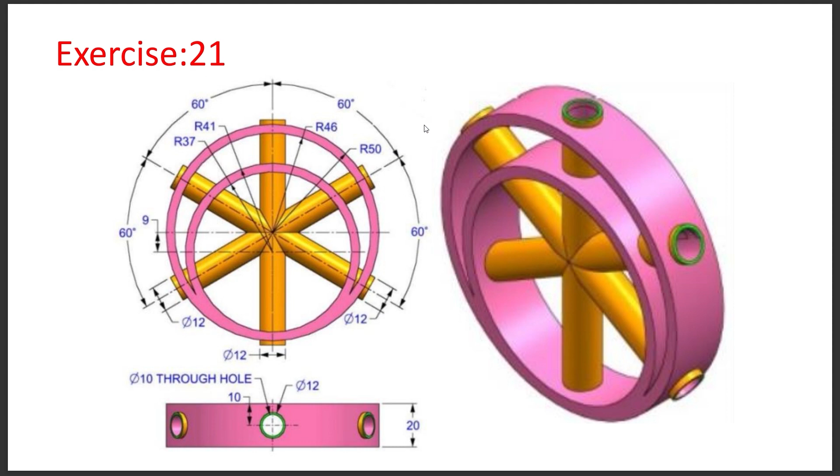After sketching this, we need to extrude it to a depth of 20 mm, and we need to provide some specific holes 60 degrees apart. Inside those holes we need to provide some bars having a through hole of diameter 10 mm inside. So without wasting time, let us start our modeling using Autodesk Fusion 360.

First of all, we need to create a new design, and you can save this one by the name exercise 21. We can save it to a specific folder by the name Fusion. Let us save it — you can see it is saved by the name exercise 21.

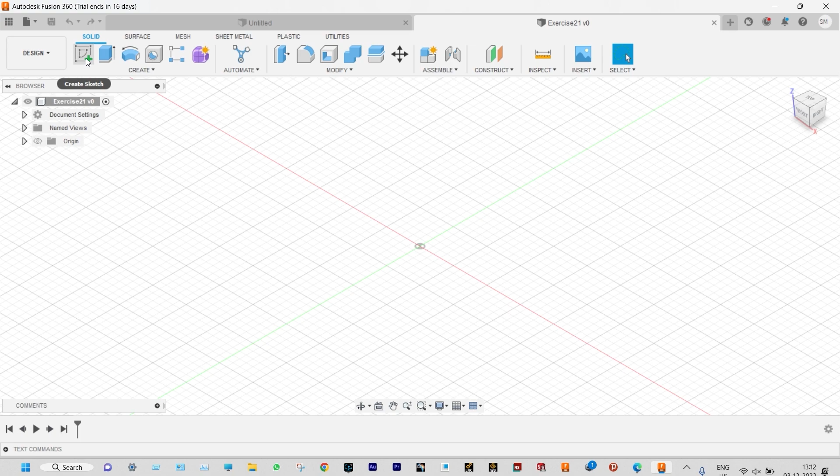As I told before, it will be started with the front plane only. So starting with sketch, let us select the front plane. Initially we need to draw one construction line. So starting with lines, and it will be a construction line.

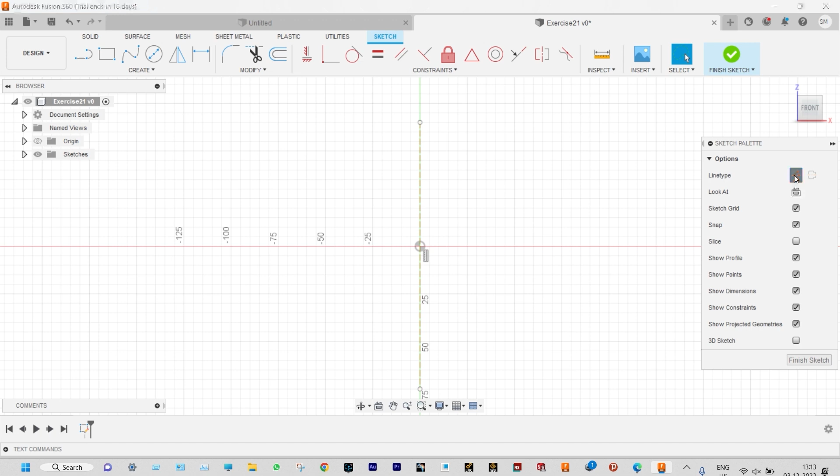Now let us change the line type from construction line to solid line. We can start drawing concentric circles from this location. This one will be having a diameter of 100 mm.

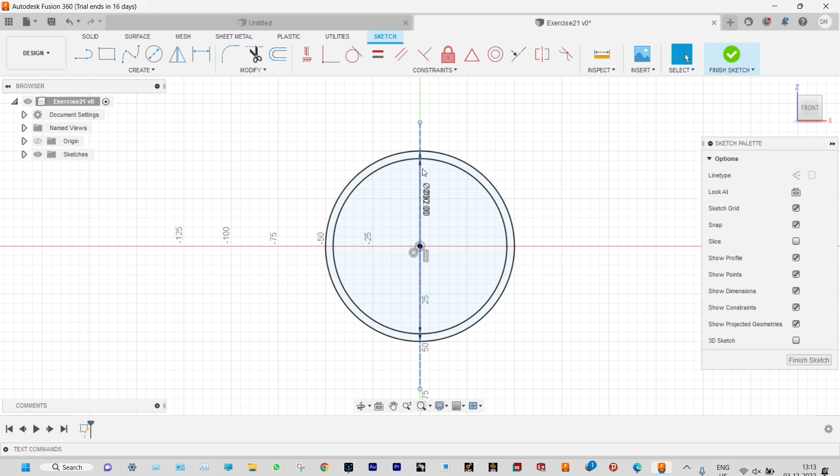Another circle to be drawn with a diameter of 92 mm — these two are concentric circles. Next, at a specific distance away with an offset distance of 9 mm, we need to make another concentric set of circles, starting from here.

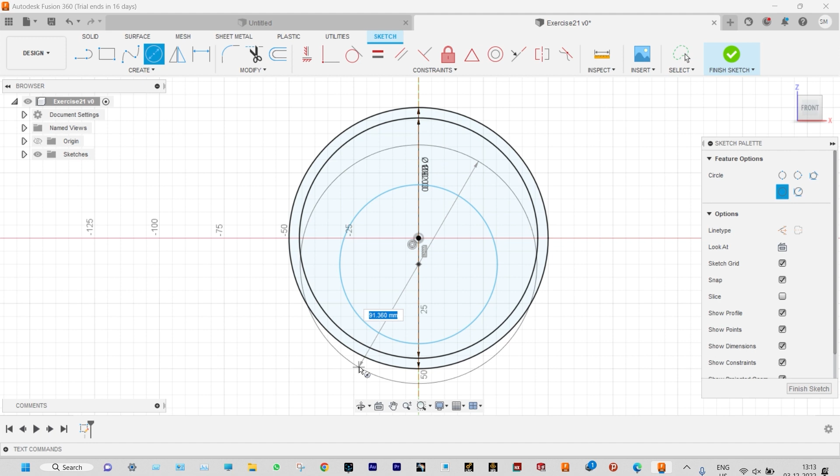Let us provide two circles at random and we can provide smart dimension later on. Let us provide smart dimension to this one as 74 mm diameter and this one will be 82 mm diameter.

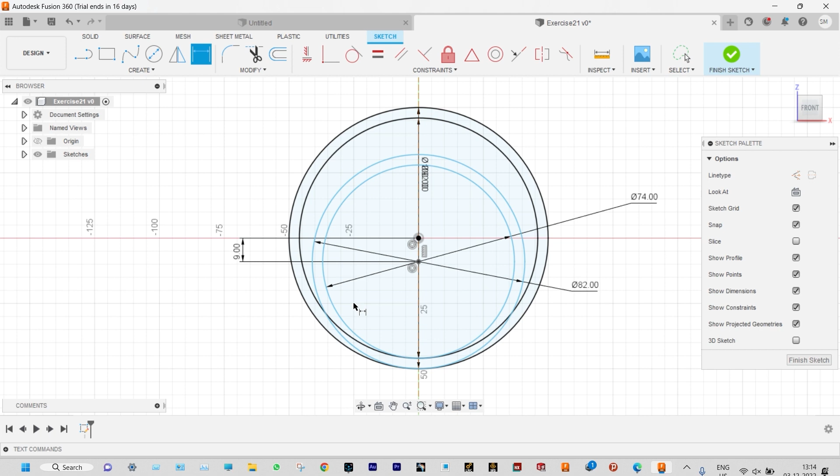Again, we need to find the offset distance of these centers and the previous center by 9 mm. It is evident that this circle is tangent to this circle. All the circles are not black, so the dimensions are not fully defined. To make it fully defined, we need to put some kind of constraints.

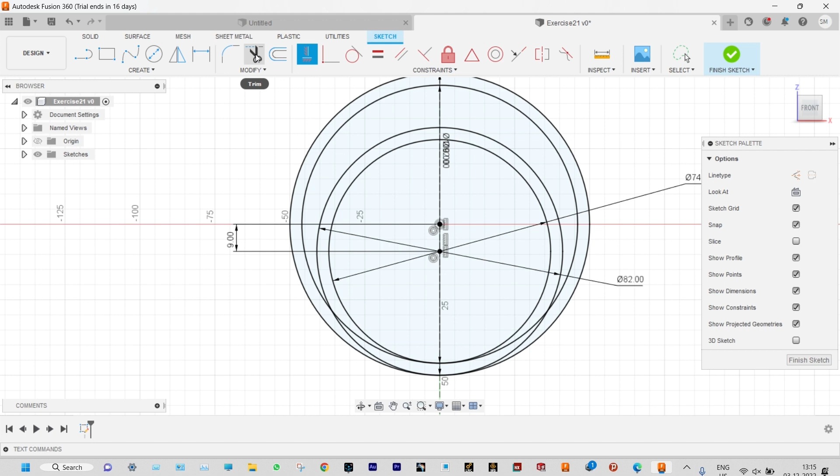Let us select the horizontal and vertical constraint of this circle and the down set of circles. Now it is clearly defined, so we can cut some unwanted entities by trimming. The sketch is complete, so finish the sketch and that needs to be extruded to a depth of 20 mm.

So starting with extrusion, let us select the specific areas. We need to extrude this one symmetrically. So from direction you can select symmetric, and from measurement you can select the whole length to be extruded by a depth of 20 mm.

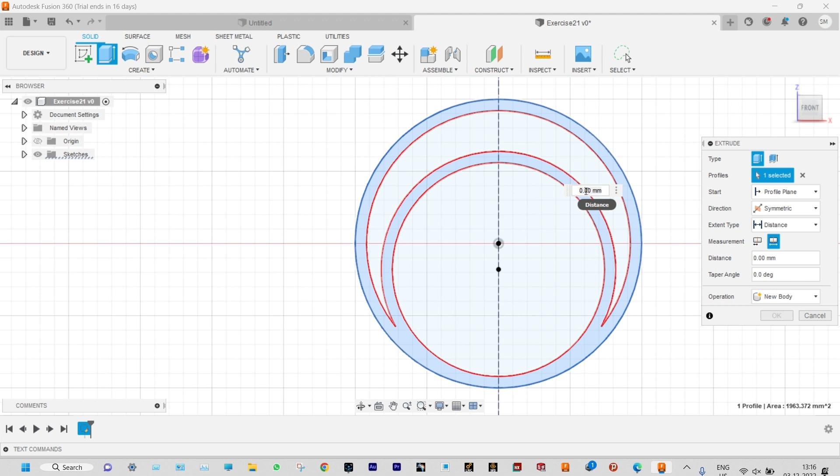And we are considering this operation as a new body. Let us see that object — you can see the drawing. The depth of extrusion is 20 mm initially.

Now what we have to do is provide some kind of holes 60 degrees apart, and the holes have a diameter of 12 mm. Inside those holes we need to provide some bars. The length of the bars is not specified, so we'll assume it is equal to 104 mm. Initially we need to make some holes at 60 degrees apart.

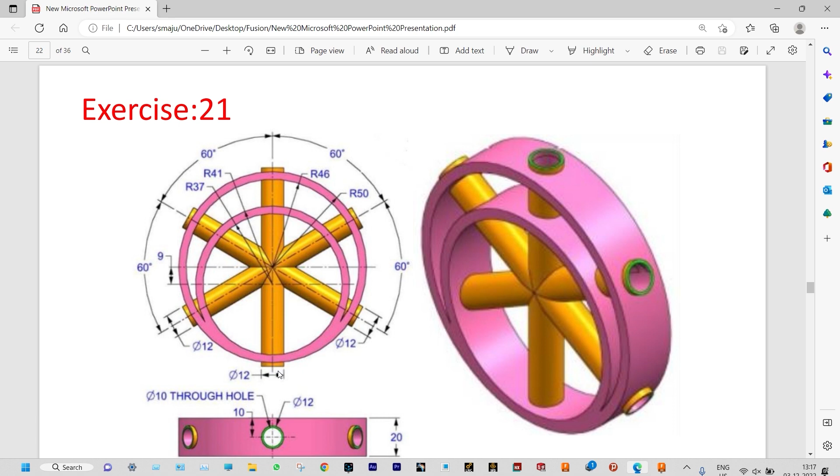So we need to start sketching on the front plane. We can create some construction lines. Let us make the line type construction, and the same type of line to be made at 60 degrees apart.

We can make separate lines at 60 degrees apart, or we can make a circular pattern of this line at an angle of 60 degrees. So we will do the pattern — this will be easier.

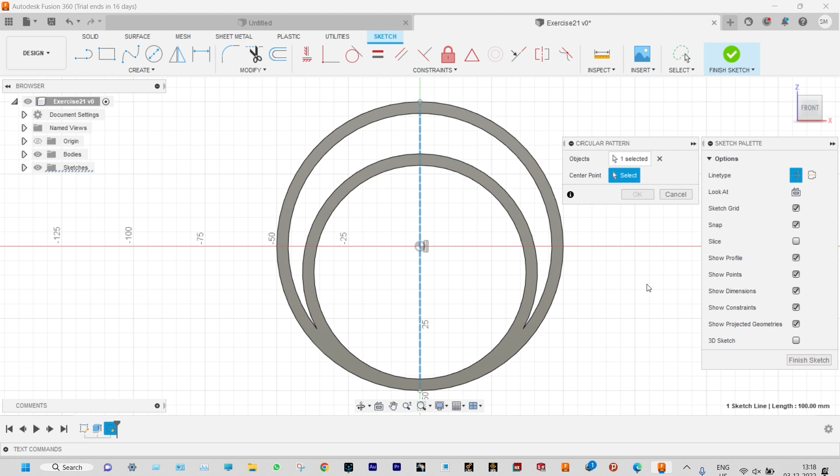So create circular pattern, select the objects to be patterned — this line to be patterned — and pattern it with respect to the central axis, this one. We need to provide 3 of this kind.

Let us see the angles in between with smart dimension. Let us check the angles — this is 60 degrees, and again we can check this one also. So we have created 6 sets of lines which are 60 degrees apart, that is 360 degrees divided into 6 different segments, each having 60 degrees.

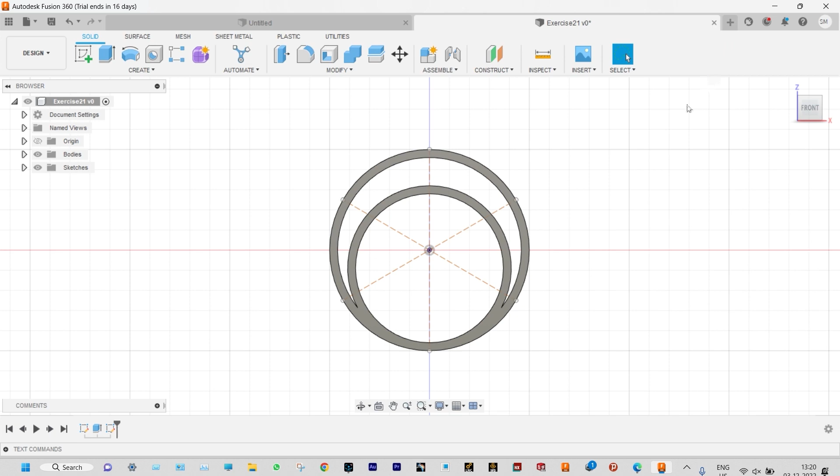Next, we need to create some holes at specific locations. Let us finish that sketch, and we need to create some specific planes. Let us rotate this one a little bit. Let us construct a plane which will be tangent to a face at a point.

Let us select that face — this one — and it will be tangent at this point. Done, one plane is made which is tangent to this point. Again, we need to provide another plane at this location and also another plane at this location, which will be tangent to these points only.

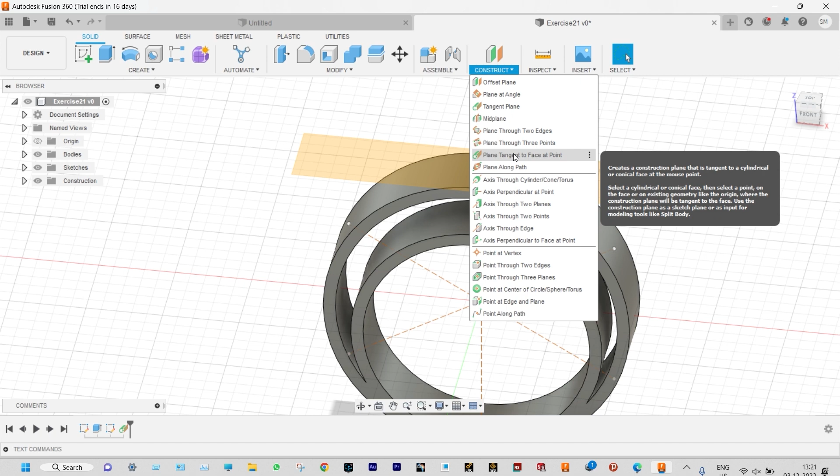So again, construct a plane tangent to face at point. This will be the face, and let us consider this one as the point. This is also made. Another plane to be made which will be tangent at this location.

So construct plane tangent to face at point. Select that face, this one, and the point will be this one. So we have made 3 different planes.

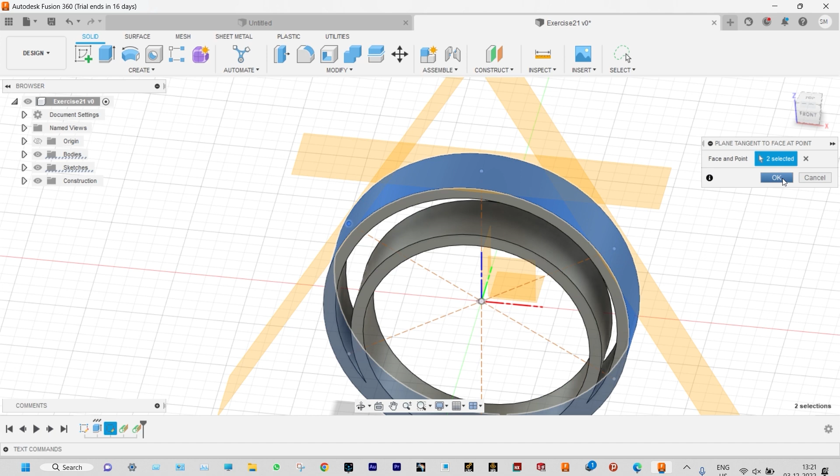Now what we have to do is, on these planes we have to make some holes with a diameter of 12 mm. Select that plane and start sketching on that. We need to draw a circle of diameter 12 mm.

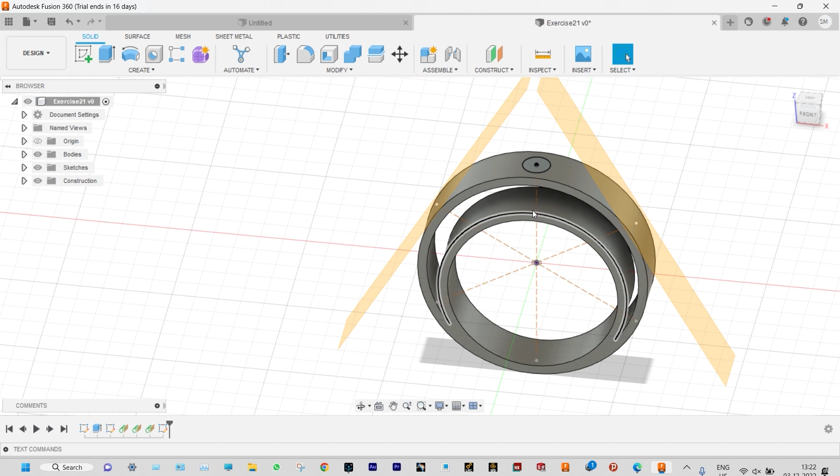Sketch is finished. Now we create a hole through this one, which will also cut this inside circular face. Starting with extrusion, let's change the direction of extrusion from here to down, and from distance you can select this one to cut all the faces.

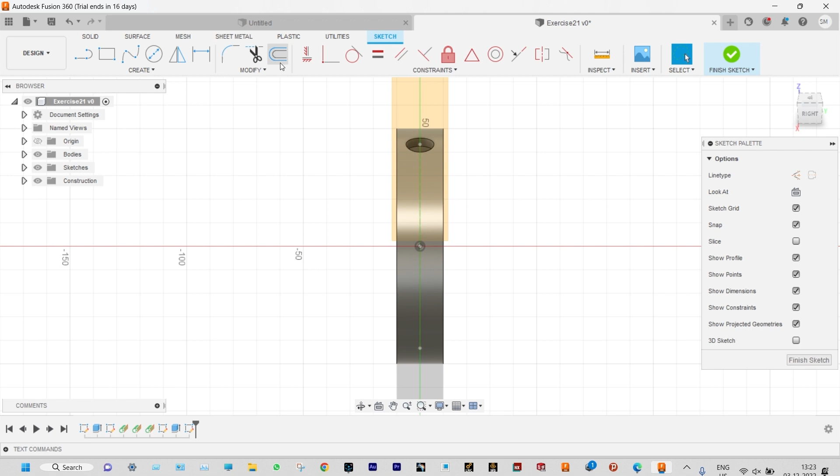Same operation to be done at these two locations also. Select another face and start with the sketching. You need to draw a circular hole of diameter 12 millimeter. Finish the sketch, and that to be cut with extrusion. Let us set the extrusion depth from upward to downward, and from distance we can make it to all.

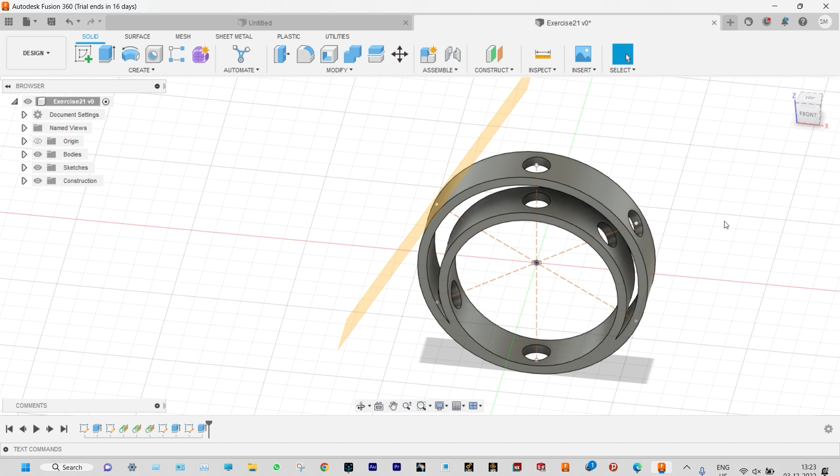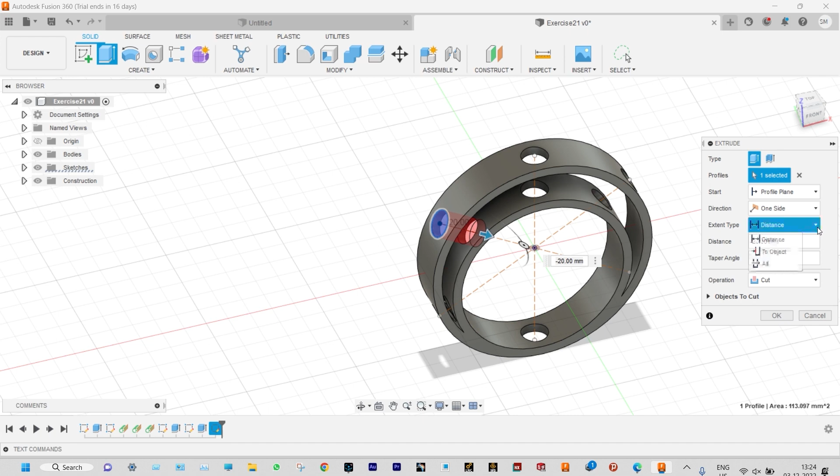Done. Now another set of holes to be made here. Select that specific plane, and we need to create one hole there. We can start sketching one circle of diameter 12 millimeter. Finish that sketch, and we can start extrusion in the negative direction, and from distance we can make it all. Done. Next, we need to provide some bars of specific length.

Length is not specified in our drawing. We assume the length to be 104 millimeter, and inside that bar there will be a hole of diameter 10 millimeter. Let us initiate the first one. You can select plane number 1. Now we can make another plane which will be offset from this one at a distance of 40 millimeter. That means we need to start sketching at the middle plane. So construct offset plane in the negative direction by 40 millimeter.

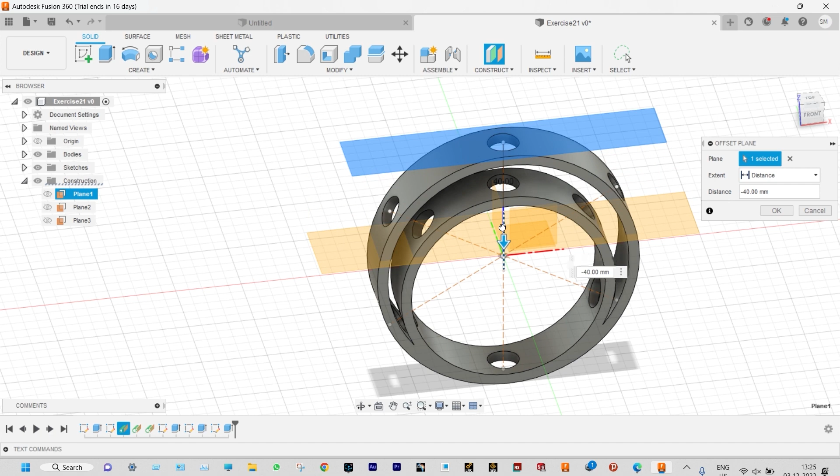Done. This is the middle plane. On the plane we need to sketch something. So select that plane, and we need to start sketching on that. Let us draw 2 concentric circles of diameter 12 millimeter and another circle of diameter 10 millimeter.

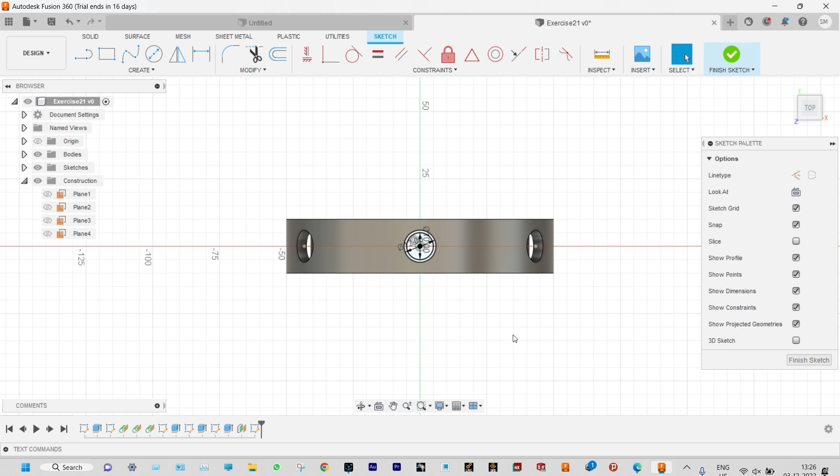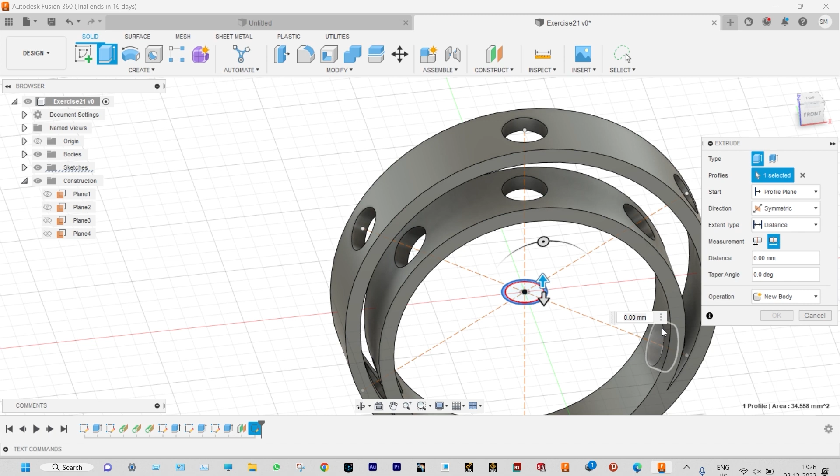Done, finish the sketch. Now we need to extrude that one to a specific depth. This is a circle, you can see. Starting with extrusion, let us select that specific area, and this one to be extruded symmetrically both sides. Instead of half length we provide this one as whole length, extruded to a depth of 104 millimeter. We also want to consider this one as a defined body, so we'll not join this one. Instead of joining, we can make this one as a new body.

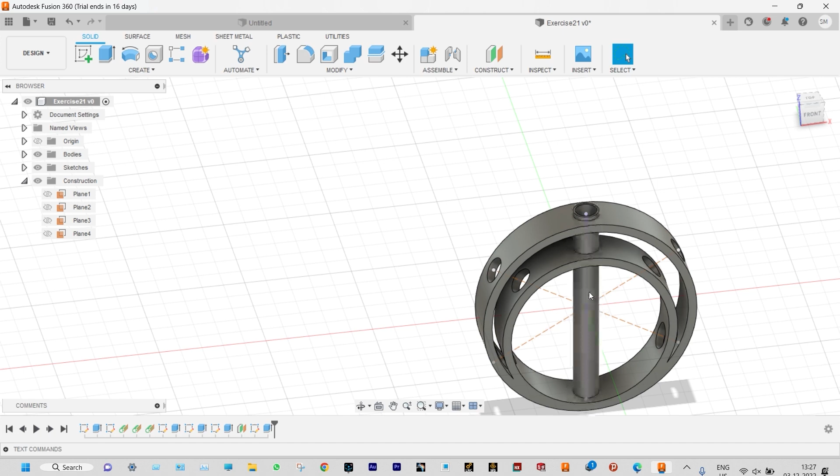Done. So this is a completely defined body which is attached with the previous pad body. Next, we can use a circular pattern on this one, or repeat the process 3 times to make similar things. Circular pattern will be easier. So create pattern, it will be circular pattern. Let us select the object to be patterned, and select the axis to be this one, making 3 sets of bars of the previous type.

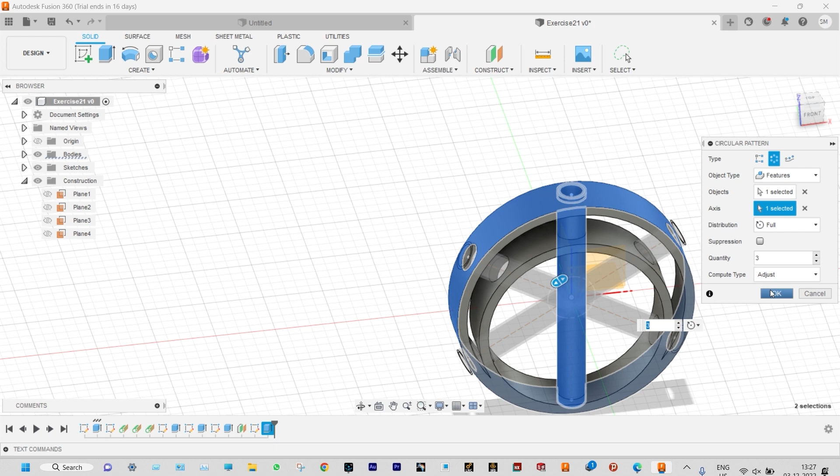Done. Now, you can see the bars from top is not through actually. So inside this one we have to make some holes, because the bars are actually intersecting each other. So what we can do is cut a hole through this one. Let us start sketching a hole on that one.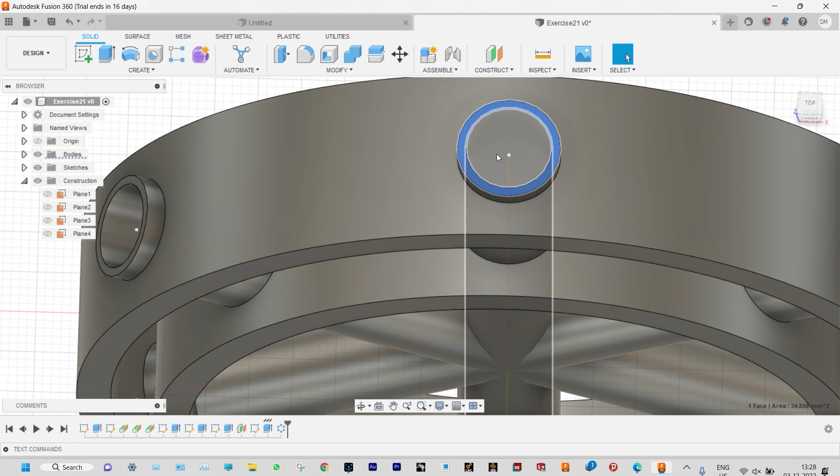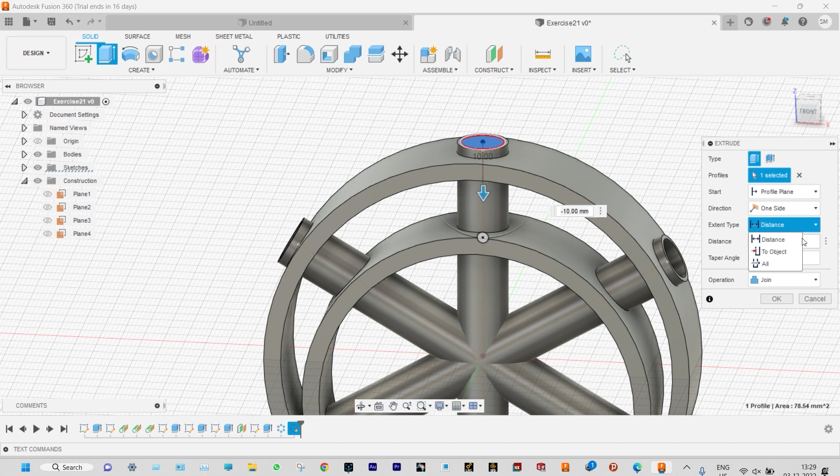Let us select that specific face, and we can start sketching on that. Let us select circle of diameter 10 millimeter. Done, finish the sketch, and we need to remove material from this one because the hole is not through. So extrude, let us select that area, it will be extruded in the negative direction, and from distance we can select all. It's done, the hole is through. So the first one is made.

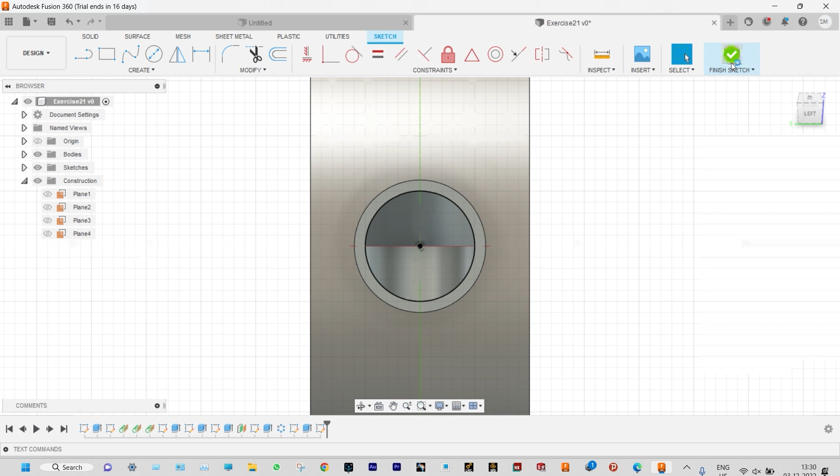Now the same operation to be done for 2 other cases also. Select this face, and start sketching on that. It will be a circle of diameter 10 millimeter. Finish the sketch and that to be extruded. Starting with extrusion, select that area, and we can change the direction of extrusion to negative, and from distance we can make it all. Done, you can see it is through.

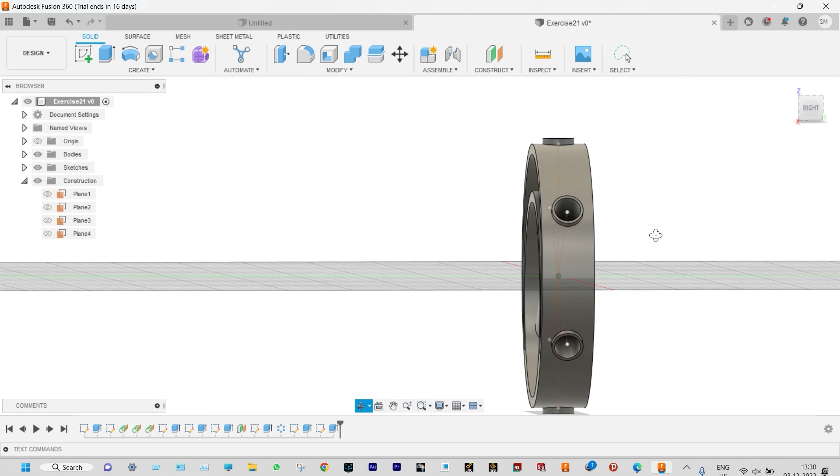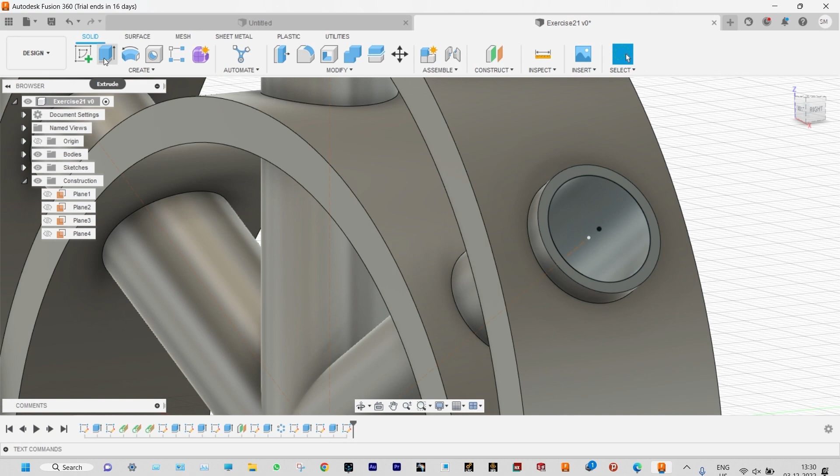Again, you can check this one, this is not through, some material to be cut from here. So we'll do the same operation here also. Select that face, start sketching on that. We need to draw a circle of diameter 10 millimeter. Finish the sketch, and we need to start extrusion. Let us select the specific area, and we need to extrude in the opposite direction. Change the direction, and from distance you can make it all. Done, you can check it again. So this is through. All the holes are through.

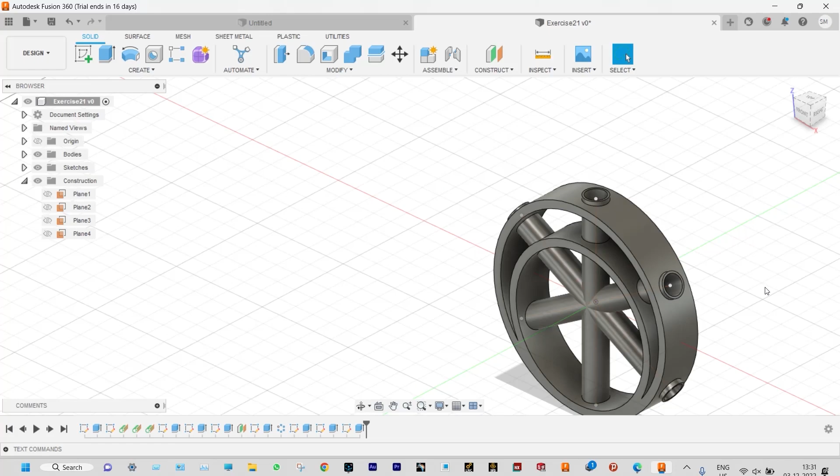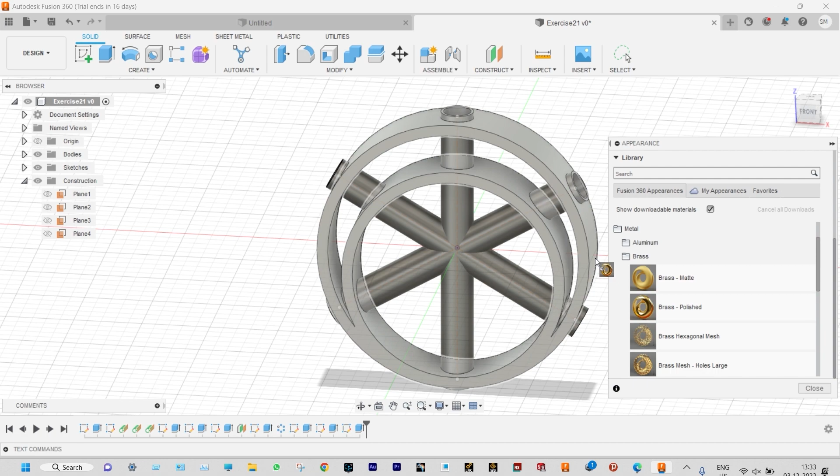So this is our model, but in this case we have provided different materials for these bars inside. Now we can provide different materials for these different sections. So hit A and we select metals. Let us consider polish brass for these 2 objects, and for this one we'll consider a different material made up of copper. This will be made up of copper, it is polished copper. Done. So we have provided different material for different bodies.

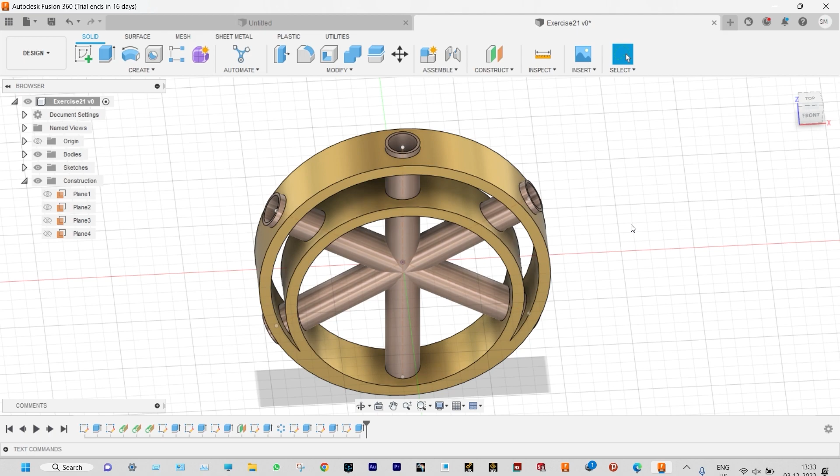You can see this one. So this is all about our exercise 21.